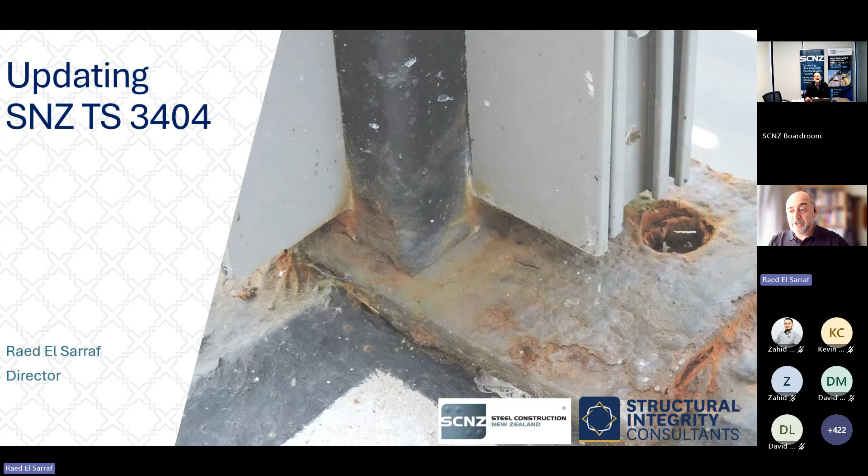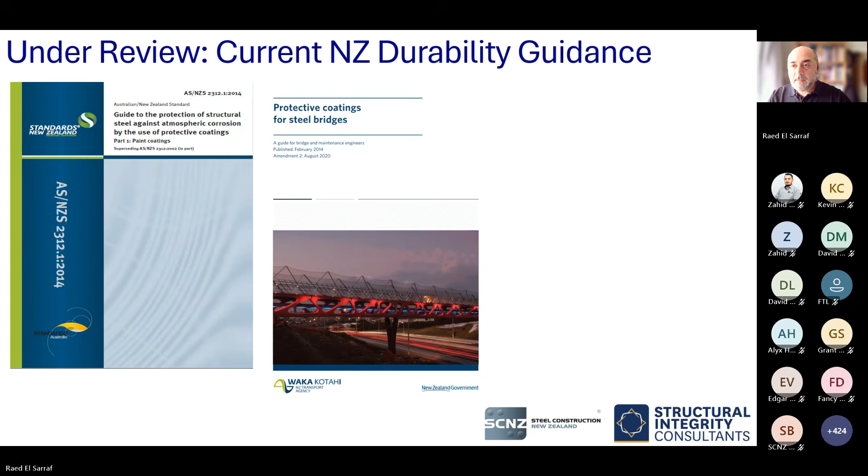So, updating Standard New Zealand Technical Specification 3404. And look, there's a lot to go through, so I'm just going to get into it. At the moment, we're in a very fortunate period of time when a number of documents are currently being revised. The key one is Standard 2312 Part 1. I'm actually on that standards committee as well, and we are not far off from finishing that document and going out to public comment soon. Protective coating for steel bridges, the NZTA document, another document I've co-authored, is also under review. And of course, the document we're here to talk about today, Standard New Zealand Technical Specification 3404.

You're probably now aware that it is out and there's been quite a few changes. The original document was first published in 2018. It was cited in the building code as a means of an acceptable solution in 2018. And we're happy to advise that it's been elevated to a full standard as NZS 3404 Part 3. And as Kevin said, Parts 1 and 2 are currently out for public comment, and there's more about that later on.

We held the first committee meeting to update this document back on the 22nd of July, 2025. Public comments closed 20th of March this year, and it was released just over a year later. I was quite impressed. You kind of forget when you're in the midst of updating and working on these things, but a lot of work went into it, and I'm quite pleased to see that it is out now. And we did receive 118 comments, which I was told is a good number, as in enough to show that people actually read it and gave us good feedback, but just under the number that would show we made a big mistake. So it was just the right number of comments, apparently.

I'd like to acknowledge the committee members. Here they are on the screen. There's quite a few of them, and as you can see, there's a cross-section of the industry, from asset owners, corrosion specialists, and industry representatives. I also wish to recognize and acknowledge Mark Ryburn of MBIE and Willie Mandeno of WSP.

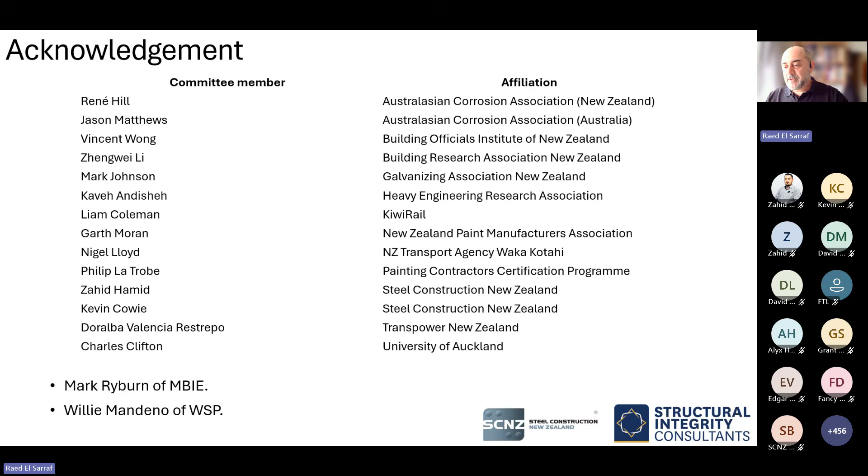So what's the scope? Now we're going to go through key changes, revisions, updates that I would like everyone to be aware of. So what is the scope of this document? It sets out the primary and supplementary corrosion protection systems and technical requirements that are necessary to provide the required level of durability to steel structures and their components as defined in NZS 3404 Part 1 in the New Zealand environment. And like I said, it is showing you a pathway to demonstrate compliance with the acceptable solution as well as the verification method. So pretty much it's all there.

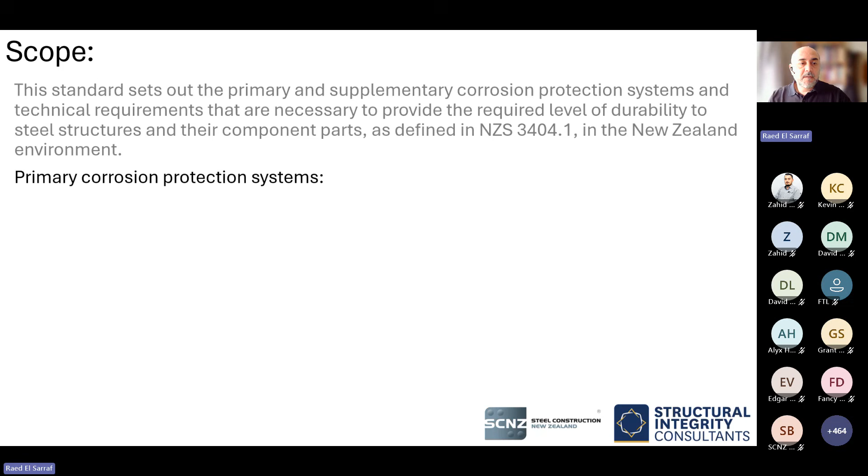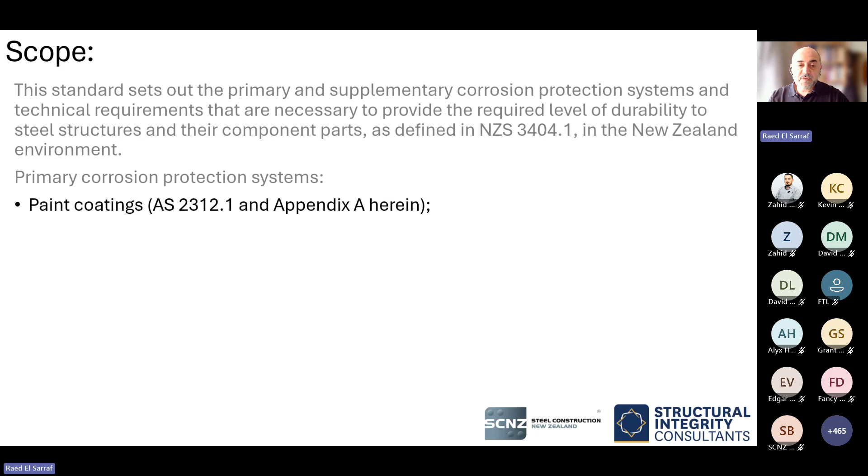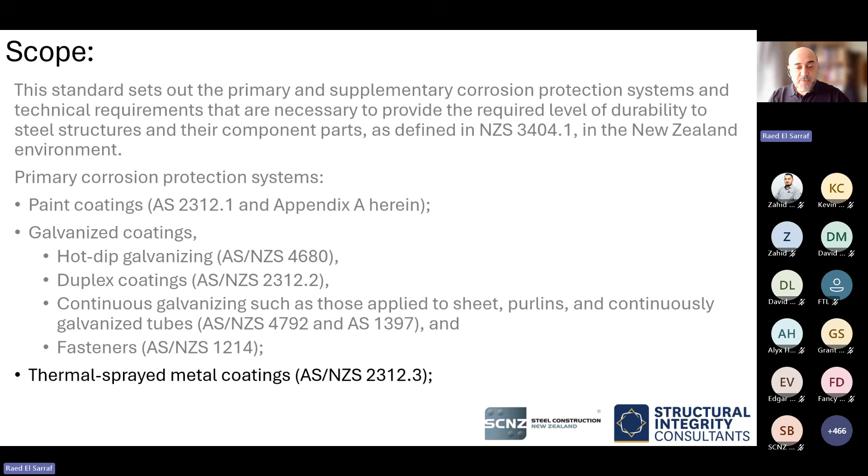So what are the primary corrosion protection systems? Paint coatings, which are 2312 Part 1 and Appendix A. In the document, there are some additional paint systems that we've added from the previous one. Galvanized coatings, so whether it's hot dip, duplex galv, continuous galv, or fasteners, that's what it covers as well. And thermal metal spray coatings, including weathering steel. And of course, you can see it's in addition to the additional references that I refer to.

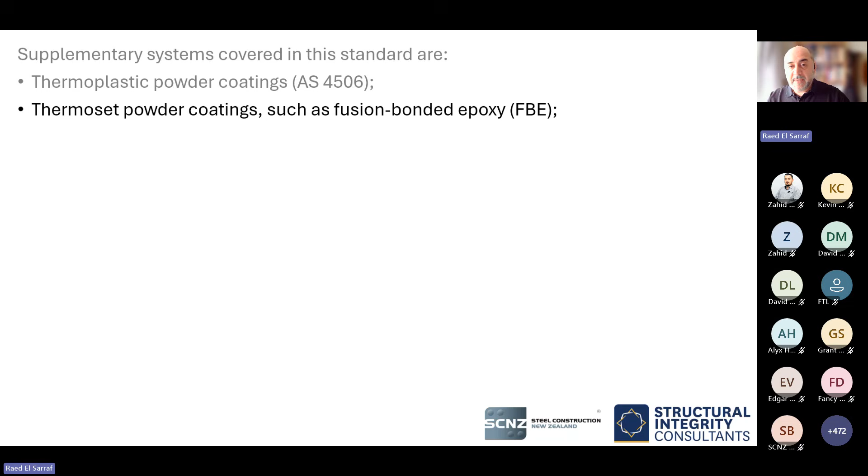Supplementary systems that are also covered in the standard are thermoplastic powder coatings, thermoset powder coatings, such as fusion bonded epoxies. For quite a few years, fusion bonded epoxy, to my recollection, the last 20, 30 years, was not offered in New Zealand, but the last couple of years it's back in the country, and that's the type of system we use, for example, in pipelines, and you can also use it for rock anchors. So it's good to see that type of protection back available in New Zealand.

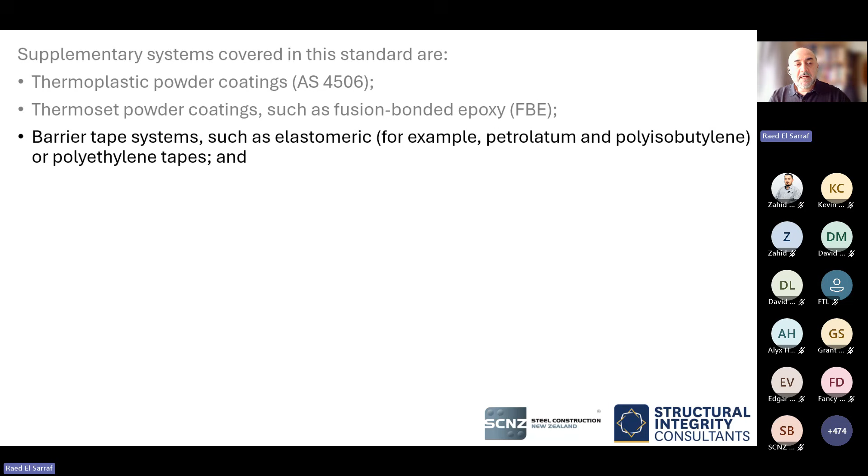Barrier systems: a lot of you are probably familiar with petrolatum, the old Denso tape, but there's also the new viscoelastic type of tapes and polyethylene as well. So barrier tape systems are also included. And some may be familiar with plastic caps used to provide additional protection for bolts and nuts. And there are other protection systems used on fasteners, which we'll cover in a little bit.

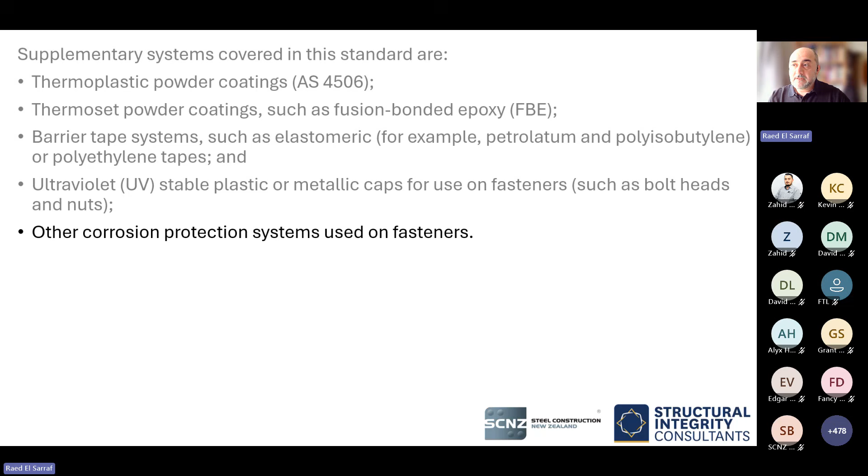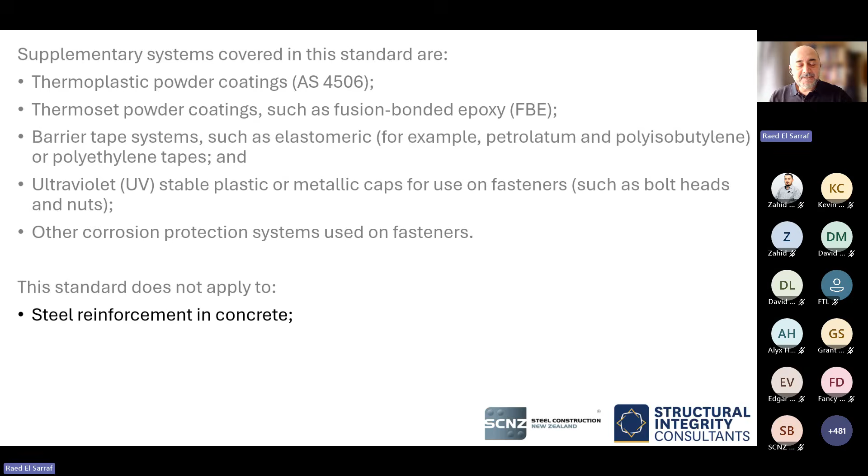So the next key thing, what it does not apply to, and one of them is steel reinforcement in concrete. Over the past number of years, I've seen people try to justify things to do with reinforcement which are not really applicable to the standard. So we now specifically exclude steel reinforcement. So please do not use this document to justify, let's say, mistakes, to put it mildly, in design. And galvanized wire. So those are the two things the standard does not apply to.

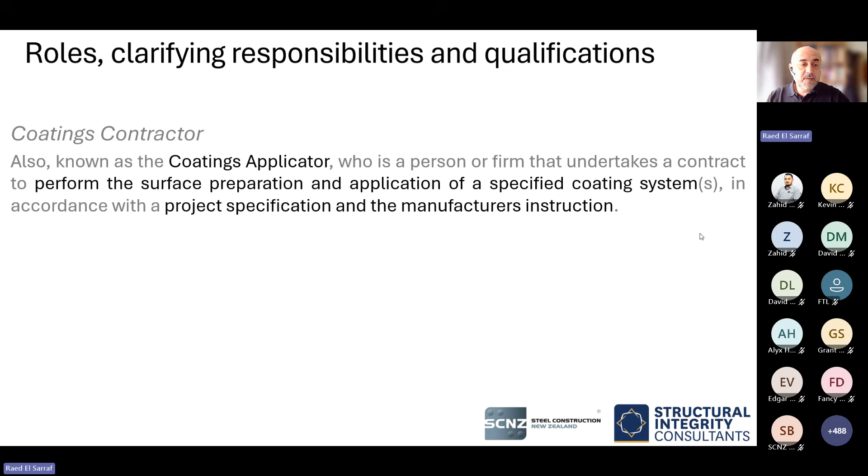The other thing, we also clarified different roles. We've added those to what we had before. So coating contractor pretty much is a coating applicator, and their job is to do the surface preparation and apply the protective coating in accordance with the project specification and the manufacturer's instructions. And from the NZTA and KiwiRail point of view, at the moment, only applicators who have painting coatings certification program accreditation can undertake the work. That's specifically for these two asset owners.

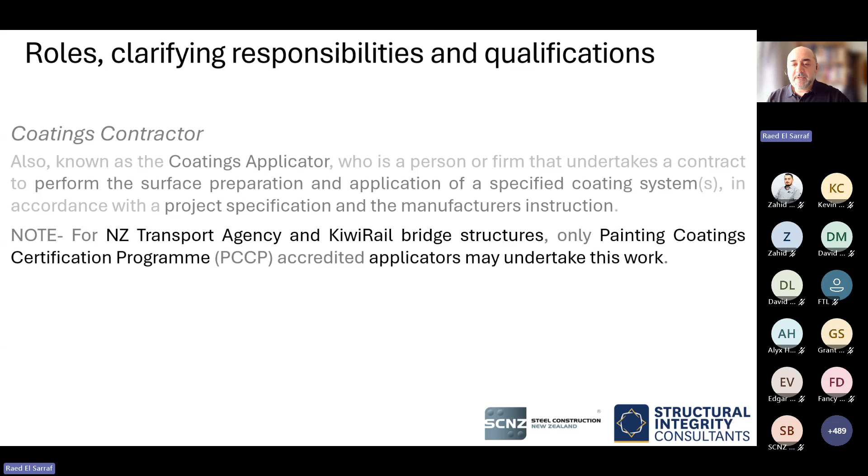For everything else, the recommendation is you have, let's say, an ISO 9001 applicator, but I also understand that SCNZ, with the steel fabricator scheme, are also developing a different scheme that will also help get the applicators accredited, and give you assurance that, I won't say they know what they're doing, but at least they have the right systems and processes in place to ensure that everything goes right.

Corrosion specialists. This was there before. We've just explained or clarified it a little bit better. Such a person is competent to advise, specify, prepare, and or review all matters relating to durability design, corrosion, coating related advice, specification, and or reports. It's pretty much someone like me and others in the industry that you can go to when you need advice on anything related to corrosion and durability.

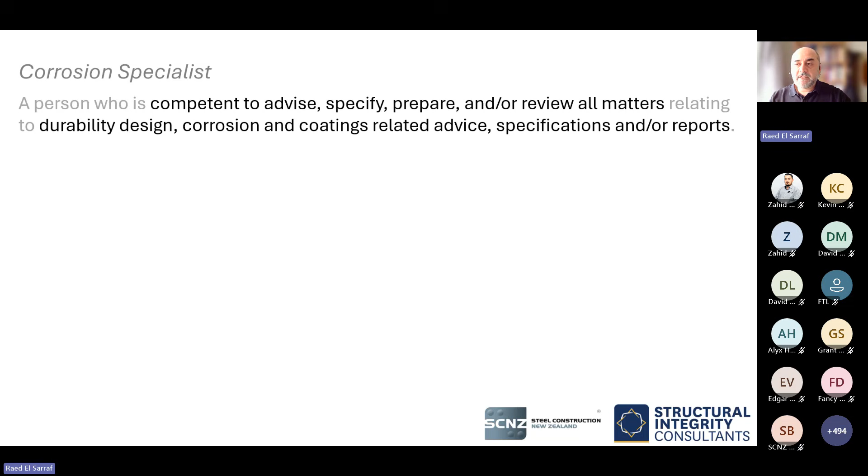Now, that person is not just experienced, they need to have certain qualifications. It is one of them, not all three. So an AMPP corrosion specialist or an AMPP protective coating specialist. Now, for AMPP, some of you will probably remember the old NACE. NACE has joined with SSPC and formed the Association for Materials Protection and Performance. So AMPP is the new NACE, I guess you can say.

Or someone who is an Australasian Corrosion Association technologist, who has either completed the coating selection and specification course or holds the current AMPP certified coating inspector certification. That AMPP certified coating inspector certification is the old NACE 2, if you remember that terminology. So such a person has one of those qualifications or that combination. And the key thing here, to get one of those, you need at least 10 years experience. So it's not someone who just did a course. It's experience and qualification.

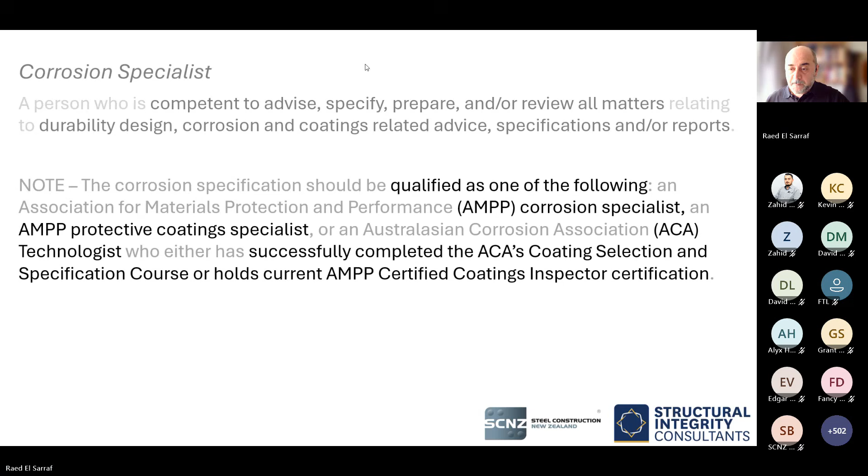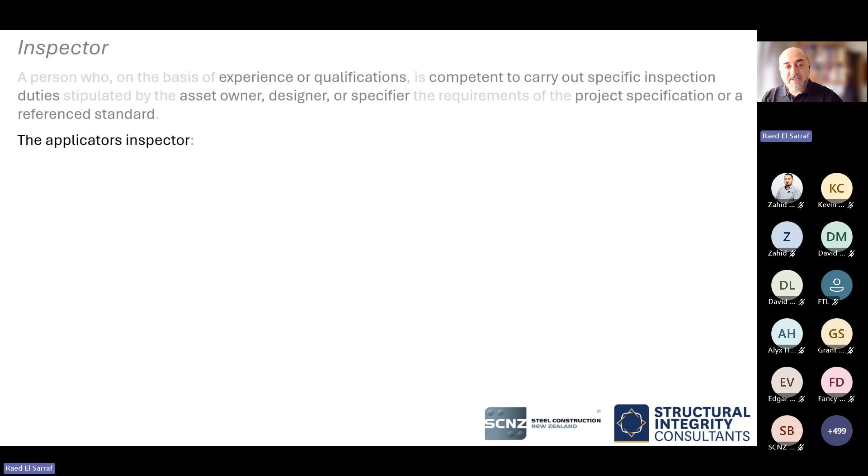Okay, an inspector. Now this is going to be a big thing. So who are inspectors who can do the work? They are, by experience or qualification, competent to carry out specific inspection duties, typically stipulated by the asset owner, designer, or specifier, to make sure that the project specification or reference standard is done the right way and meets the requirements. So the applicator, their inspectors, should have either CBIP, AMPP Basic Coating Inspector qualification, which would be old NACE 1, or if you're doing hot dip galv, an ACA hot dip galv certified inspector.

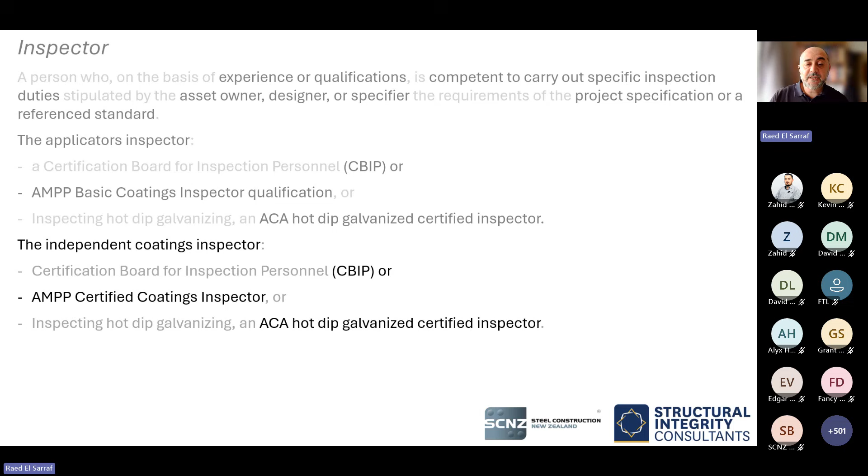If you have engaged an independent third-party coating inspector, same CBIP, but it's the AMPP certified coating inspector, which would be old NACE 2, or for galv, the hot dip galv certified inspector. Now, this has happened a lot in the industry, so we felt that we need to put it in here. That's why I also made it in bold. It should be noted that a protective coating supplier, so your paint supplier representative, is not the right person or is excluded from acting as the applicator inspector or the independent coating inspector.

For the past number of years, I've seen people where they do a job and they said, oh, the paint rep came, he signed it off, it's all good. Well, no, it's not. It's not just someone going out there doing a random check once and that's it. There's a whole process that needs to go through. Again, all that process is listed in 5131. We'll talk about that a little bit more.

But just to clarify, your protective coating supplier representative is not the right person to do the job of an applicator inspector or the independent coating inspector. They can go and do their own internal checks and do spot checks or whatever, but they're not fulfilling that role. Okay? So please go out there now and tell people you can't do that.

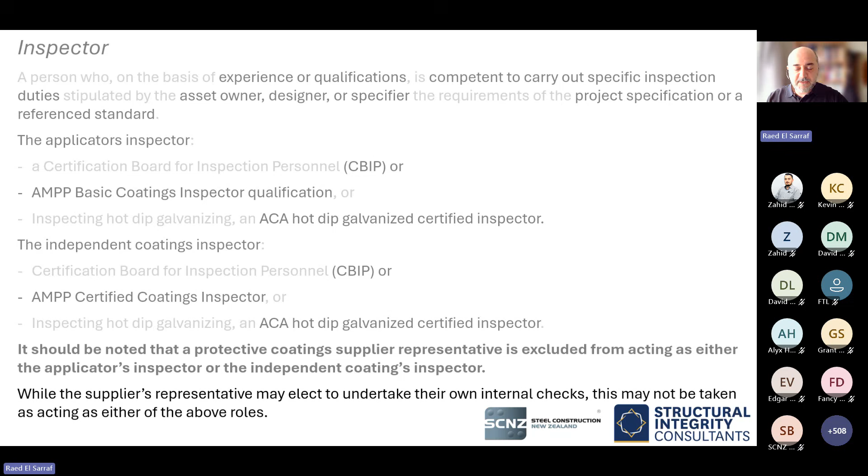We have clarified now the following flowchart that just tells you how to specify a corrosion protection system for both atmospheric and non-atmospheric corrosivity. This was based on the work that was in the HERA report R4133, the New Zealand Steelwork Corrosion and Coating Guide. So we've just tidied it up and made it align for this document here. So if you follow those steps, you should get the answer that you're after.

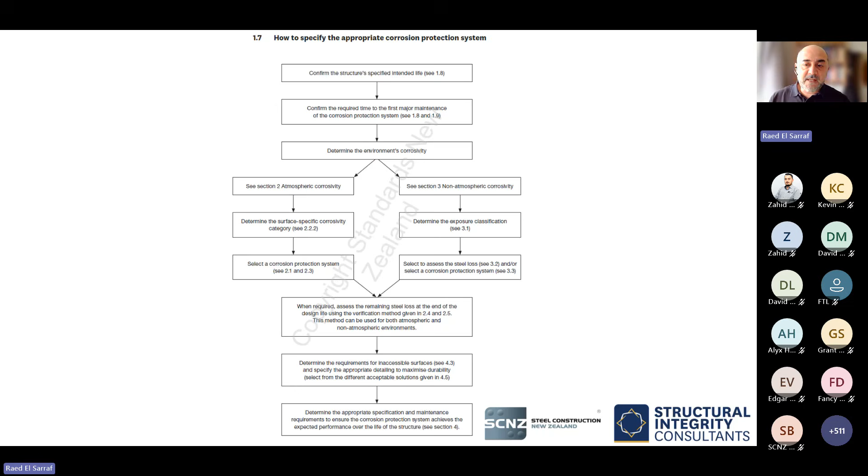Okay, a key change here. You're probably all familiar with the corrosion maps and table 2 that give you the surface-specific atmospheric corrosivity for external and internal environments. The key change here, hopefully you can see my mouse, is down here, C3. So previously this used to be 5 to 20 kilometers for West Coast and South Coast, South Island, and it was 1 to 5 kilometers. That has been reduced to these numbers, to within 5 and within 1 kilometer, and what that means is for external exposed, it is C3,

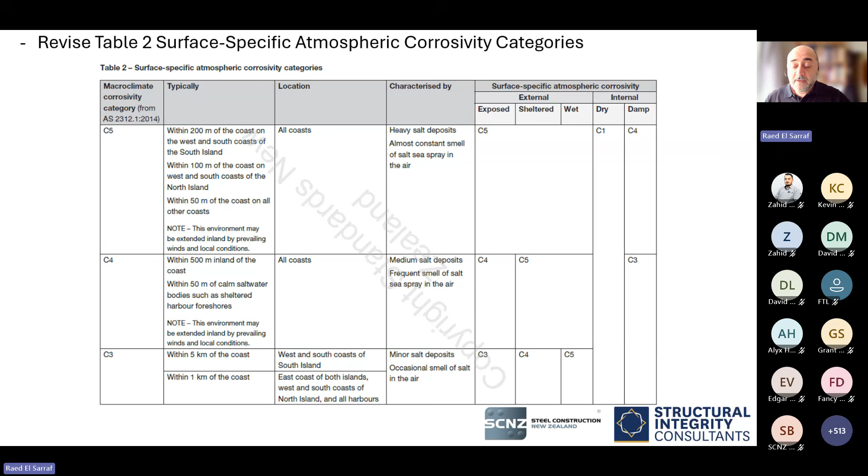external sheltered, which is sheltered as in non-rainwashed surfaces underneath an awning or underneath a bridge, for example, that is C4. So the key difference here is we've reduced those distances. Now, we didn't reduce them for the fun of reducing. This was based on a multi-year study done by BRANZ so that we can justify that change. So what that also means is what happened in those, whoops, jumped one.

So again, for the distance of 5 kilometers to 20 or 1 to 5, for external exposed C3, external sheltered is also C3, while before that was C4. And what that meant was the more corrosive environment governed in the past, and you would have had to go to a more robust system. This allows us to go back to a more realistic system, more suitable for that given exposure. So that will save a bit of effort, a bit of money when you specify the different systems that we have.

Same thing here with C2. Previously, that was C2 for external exposed, which was low corrosivity, but previously external sheltered was C3, so that's now C2 for both. So again, that gives you the ability to pick a more realistic, optimal corrosion protection system for that particular exposure, and that is a big change from what we had before.

For geothermal sources, refer to the different clause specifically for geothermal, and you probably have seen in the news recently the work that Zhengwei Li out of BRANZ did for the Chatham Islands. The Chatham Islands are a part of New Zealand, so they are included here. Someone did mention to us, you haven't included Stewart Island. It's like, well, because the work hasn't been done yet. So one day soon, maybe the next version of this document, we can finally put Stewart Island on. But for now, these are the main changes in this particular case.

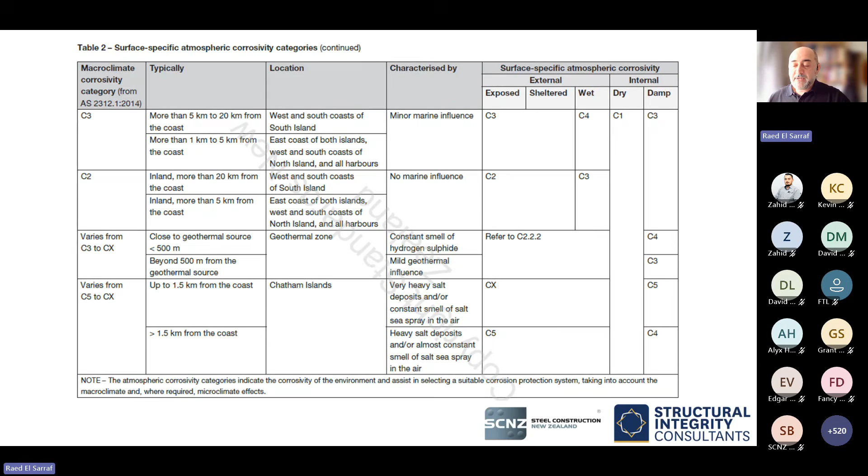Better clarification on what hidden steelwork, what is considered dry or damp. A lot of people ask that question still. So hidden steelwork that is within a fully insulated area behind a thermal break. And if you've been to my presentation in the past, you probably heard me talking about thermal breaks. And thermal breaks is a requirement under the building code clause E2 and 3, if I remember correctly.

If you have steelwork behind the thermal break, behind insulation within the building cavity, then you can take that as dry. Now, what is dry is basically inside a fully air-conditioned office or apartment building. Technically speaking, if you're in a dry environment, it is pretty much C1, which means you can leave steel unpainted, and we'll point that out a little bit.

If you are on the cold side of the dew point, so there's no thermal breaks, especially, for example, warehouses, as you can see in the definition in the next line, that is considered to be damp. And as we show with the previous slide on the tables for internal dry or damp, internal dry is C1, internal damp is C3 at the minimum.

All of those definitions, clarification of what they mean, are also given in R4133, which is included under Note 1. So R4133 goes with the science of what that means. And a lot of this document was really designed where a lot of the science is in R4133, which, if you're a HERA member, you can download for free as part of your membership.

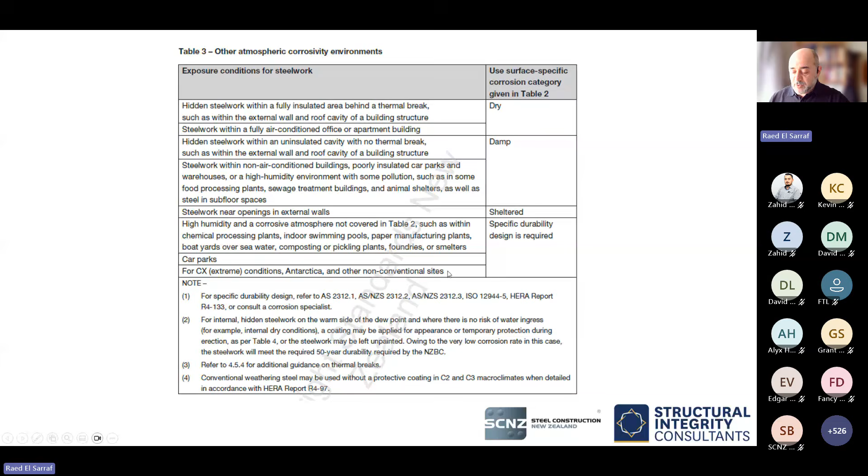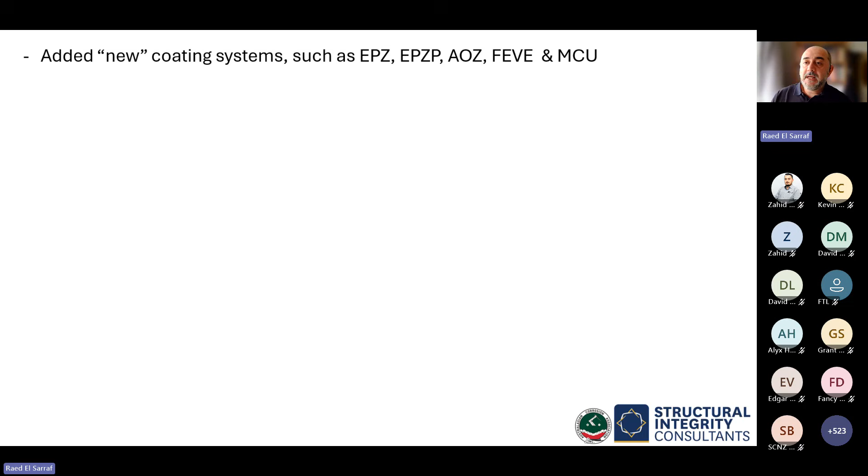We have added new coating systems such as epoxy zinc, zinc phosphate, aromatic thermoplastic organic zinc, fluoropolymer, and moisture-cured urethane. We've expanded upon those. And for those who live in Auckland, you're probably familiar with the Pukiko Bridge, I believe they call it, which was refurbished, the first motorway bridge that was reinstated with fluoropolymer.

Hopefully the red still looks nice and red and flash. It's been a few years since I've been there.

We have added 50-year coating durability systems to satisfy the 50-year requirement of the building code. So that's all given for C2 to C5 environments, while before we stopped at 40.

And now just remember the paint system that we have, or the corrosion protection system, which does include galv and metal spray, given in our document 3404 part 3, are not the only systems you can use. There are others, such as those given in the paint standard 2312 part 1, the galv standard part 2, the metal spray part 3, and also now for the first time ISO 12944 part 5. So it's not just what we have here.

You can go to other systems, or if you go to a paint supplier or corrosion specialist and they come to you and say, well, you can consider this system here according to one of these documents, that is okay. So don't limit yourself to what's in 3404 part 3 only. There are other systems you can use as well.

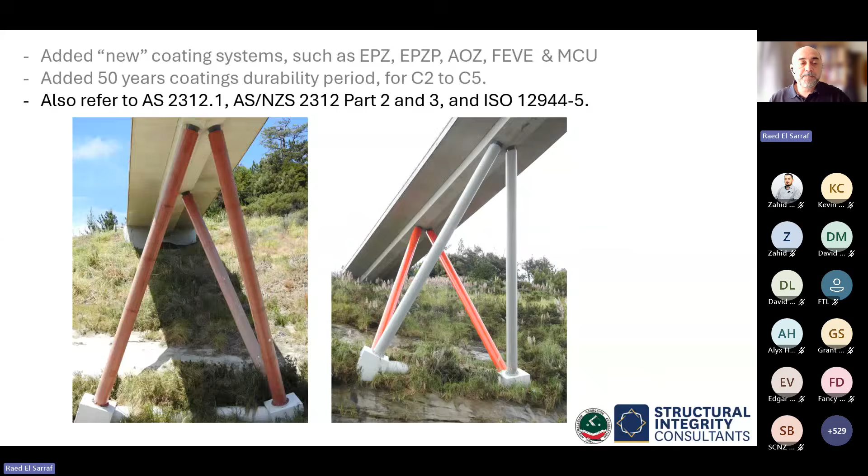Now, in the past we had it, but apparently it was hidden in the notes and wasn't that clear. But now we specifically say that steel in C1 does not require additional corrosion protection and may be left unpainted or bare. This is now a clause in the standard that you can use, as long as it's within the warm side of the dew point, thermal breaks, insulation, all that stuff that you need to comply with.

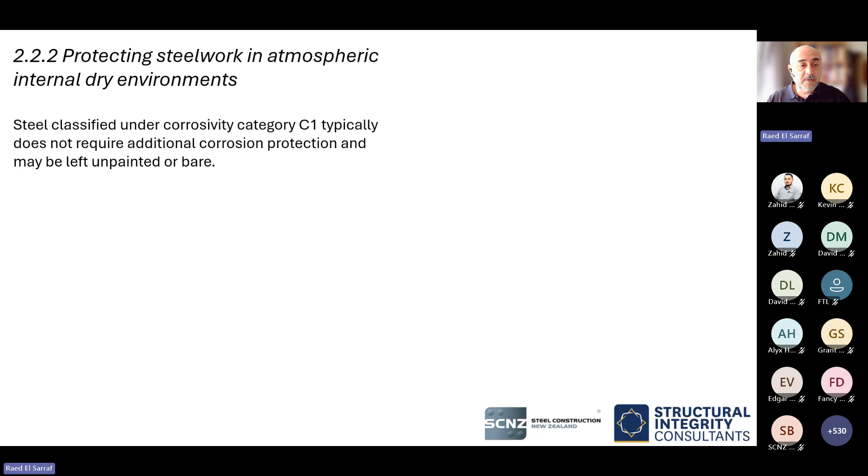However, if you do require an aesthetic finish or temporary protection during construction, then you can use the guidance, the systems given in Table 4. They're all there, and it tells you what exposure it can be exposed to, which is the last column, and how long it may be left in that condition. So the options are there for you to do so.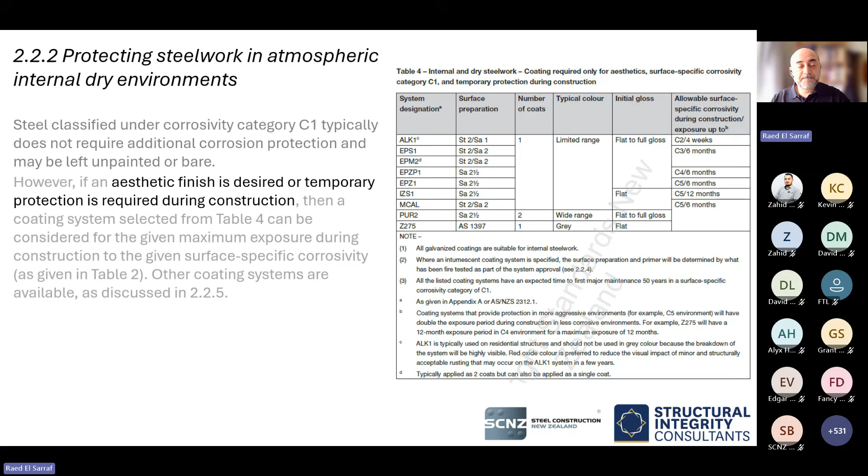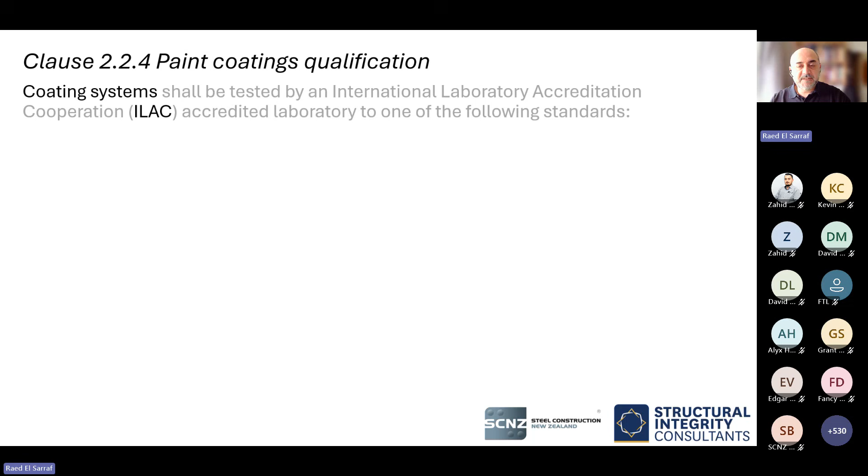This is really more for the paint supplier. In New Zealand, we're quite fortunate that most of the paint suppliers are already global companies. They have all the required qualifications. Their paint companies are already accredited and qualified. But if you do have, let's say, a new system, as long as it's been coating system tested to an ILAC accredited lab, and it has one of these.

So most of the systems in New Zealand do have APAS, Australian Paint Approval Scheme. Most of them have that. Or NORSOK M501, which is pretty much what you'd consider using in a marine environment, C5-CX. And again, for the first time now, we've clarified it, ISO 12944 Part 6 or Part 9.

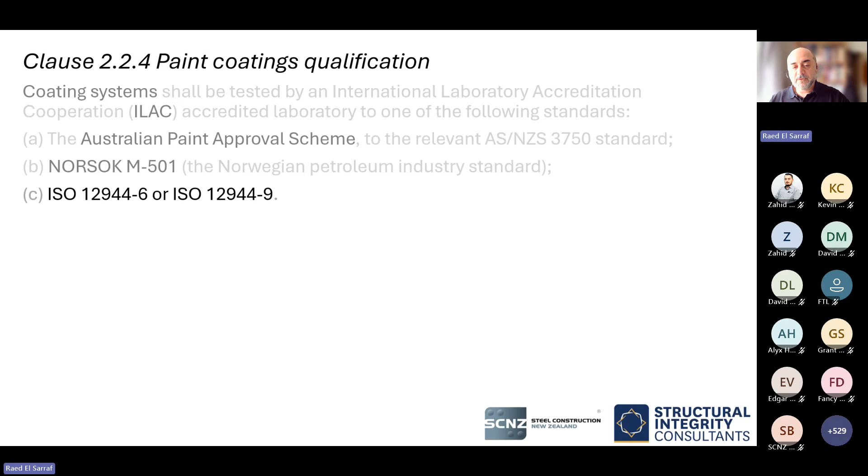So if you have someone come to you with a paint system that has one of these, you are okay, in the sense that this paint system has been tested, it's accredited, we know it will perform and conform to these requirements and these standards.

Now, why this is important, the other part of it is you probably heard in the past, a lot of paint companies would come to you and say, oh, we've done these tests, and based on salt spray test results, it's okay. We're specifically saying, no, it's not. We do not accept salt spray test results to ISO 9227 or ASTM B117. Not accepted. What we have before is what we want, especially the NORSOK and ISO 12944 Part 9.

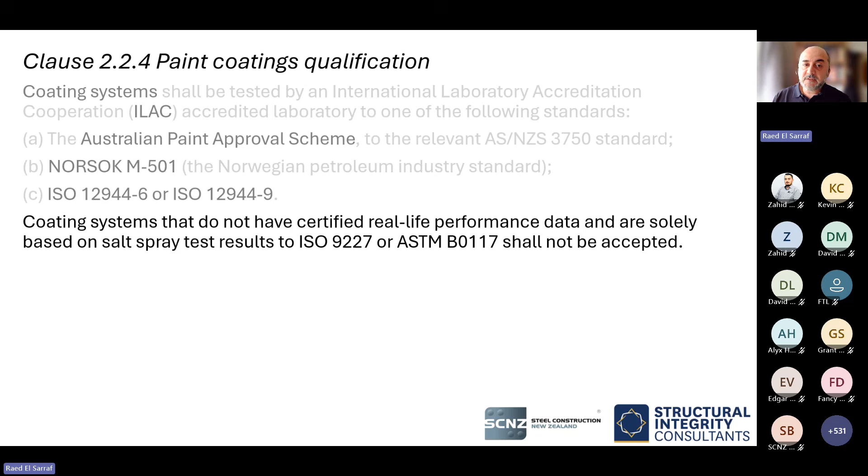Those are really stringent cyclic accelerated weathering testing, which are really suited to show that paint system will give you typically, whatever it is, 15, 20, 25 years in a C5 marine environment. That's what we want. Now, this is for most people, you're probably not going to be exposed to this, but the next part is important.

For intumescent coatings, and this is, I understand, quite a big topic at the moment in the industry, we're talking about the full system. So it's not just the fire intumescent itself having undergone a fire test. The full system, which is typically a primer, build coat, an intumescent, or even if it's just an intumescent, the full system must be tested for the given standards here. So AS 1530.4 or NZS BS 476-21. And where durability is required, then everything else we have in this standard must be complied with.

And again, I gave a presentation quite a few years ago that showed that you can have intumescent systems, whole systems that give you both durability and fire protection. But the most important thing here is if someone comes to you and says you should use this intumescent coating, but then you're going to use someone else's primer or someone else's top coat, and the whole system was not tested to show that they're compatible and work together, then you shouldn't accept that solution. Go with a full coating system that's been tested.

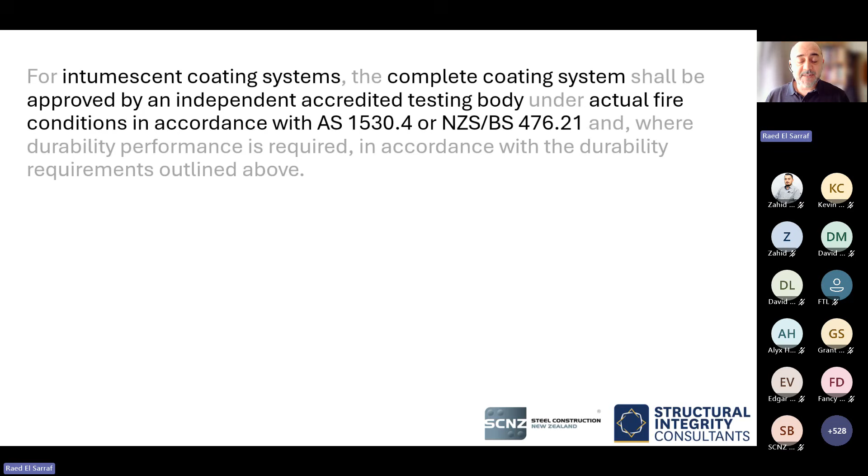And that's what I was saying here. All components comprising the system shall be compatible and shall have been tested together as a complete system. That's probably another big lesson that you can go out to market now and say. So honestly, if you go to the big paint suppliers, they'll probably come to you with a full system and you will be fine. It's just when you have someone coming with, use this intumescent and we'll just mix and match. It doesn't work that way.

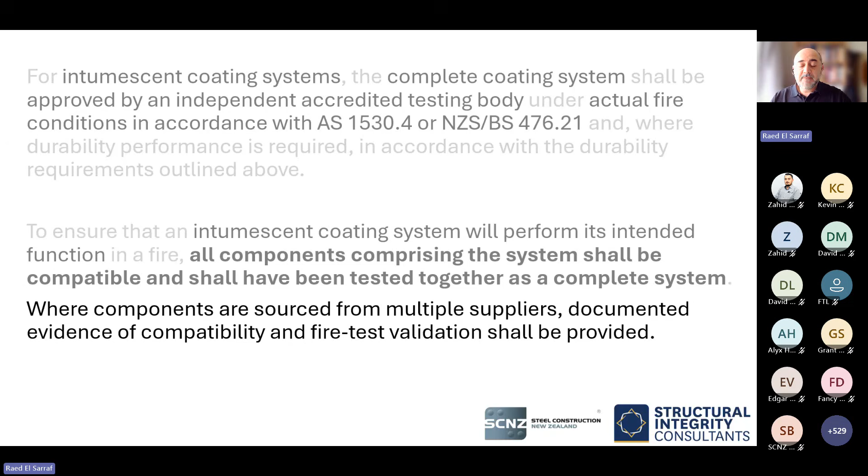And where it is sourced from multiple suppliers, they just have to show that the test has been done. That's it. That's all you need to ask them. Like, okay, can you show me the test has been done? If they have, then it's fine. But that's what you need to go for.

Other paint systems we've also discussed, just referencing here, you don't have to read this. So powder coatings is now there with the references. Proprietary roofing products, so you've probably seen New Zealand Steel or New Zealand Metal Roofing Manufacturers requirements for the proprietary system, so follow their recommendations. And fasteners, so it's not just gal fasteners. So if you're familiar with property class 8.8 bolts, they always come gal, that's fine.

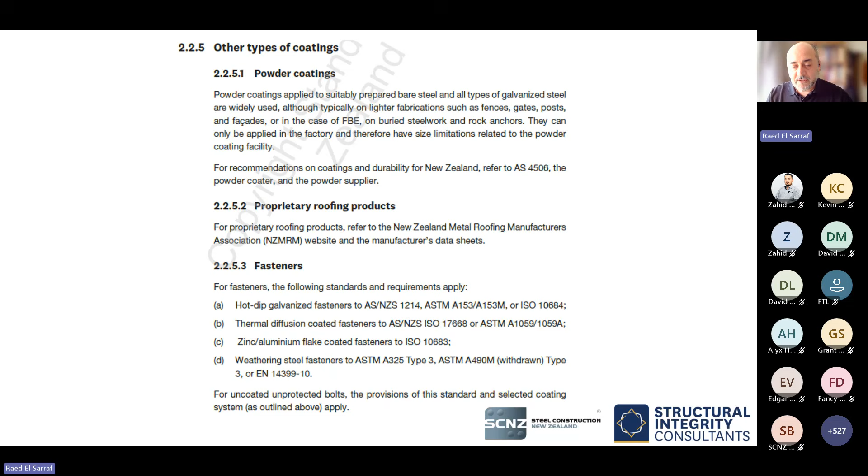But there's also other types of corrosion protection systems for fasteners, from thermal diffusion coated fasteners, flake coated fasteners, and weathering steel. You can use unpainted black bolts. Just be aware that once they go in, they need to be blasted and painted, and all the requirements as you do for painting steel apply. So again, it's just clarifying here, there's not just gal bolts, there are other systems, and these are the standards they need to comply with for you to use them and specify them.

Over the years, there's always this conversation about aesthetics and top coats. So because we have expected time to first major maintenance, which if you look at a system is when the coatings start breaking down and you have red rust, which is fine. That's why we have the 25 years, the 40 years, and 50 and so forth. If aesthetics is important, then the color fade resistance and gloss retention of that top coat is important here. And it is less than the expected time to first major maintenance.

So just to clarify that, we've added a new clause, 2.2.6, which gives you a bit of an idea of the typical life or period where that top coat needs to be refreshed for a C3 or under environment. So acrylics, 10 to 15 years, moisture-cured urethane, 10 to 15, polyurethanes and polysiloxanes, 10 to 15, fluoropolymers is 15 to 20. So what that now tells you is if you selected a system, you can go back to the client and say, as a system, let's say a PUR5 is a common system in a C3 environment, that will give you 25 plus years time to first major maintenance.

But you can say, Mr. Client, Mrs. Client, what that means also is in year 10 and 15, you probably have to refresh the top coat. Especially when you have primary colors, unfortunately, the reds, blues, and yellows, they just fade in our high UV in our sun. So that just gives you a bit of understanding, both to educate the client and yourself on, okay, if I pick that system, I just need to let them know that I need to refresh it.

Now, that does not mean you need to take everything off. In most cases, if you get in at the right time, it's probably a wash. Some systems you need to abrade a little bit. You can put it straight on, or you may use a tie coat, but you're not blasting everything off. It's much more what we can call minor maintenance when you refresh the top coat. For a C4 or higher environment, the expected time to first maintenance applies. We just go with that. So this is more for a C3 and under. And always consult with the paint supplier for guidance on achieving the optimal aesthetic requirements.

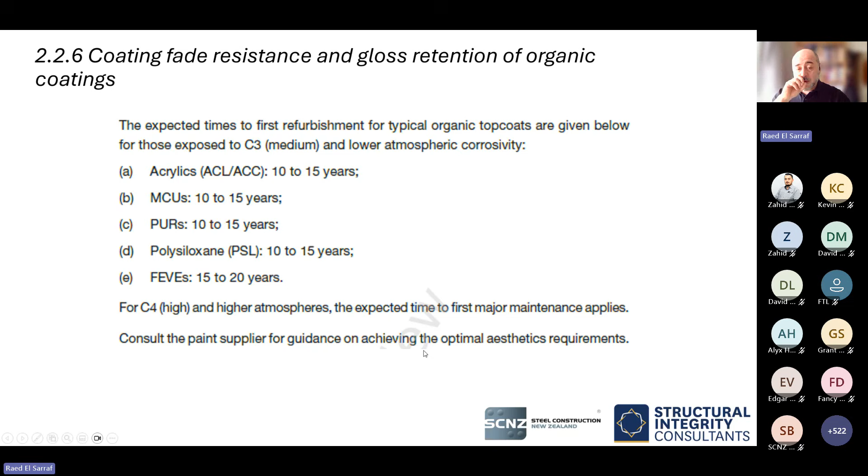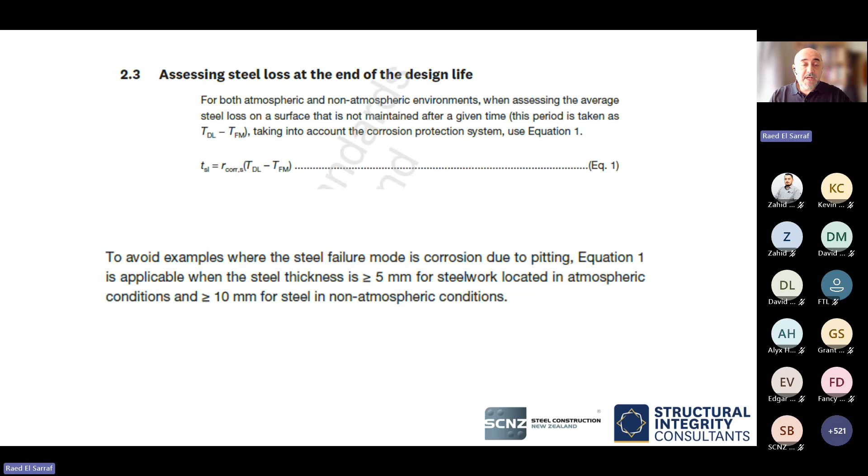Next up is a brand new equation, assessing the remaining expected life of zinc, so mainly for hot dip galv and metal spray. We did mention here aromatic thermoplastic copolymer organic zinc, which is a big word. It's made as a form of a zinc-rich coating, and in this particular case, you need to talk to the supplier. But if we're talking hot dip galvanizing, zinc metal spray, you can estimate what is the remaining life of the zinc in years for the given environment and system.

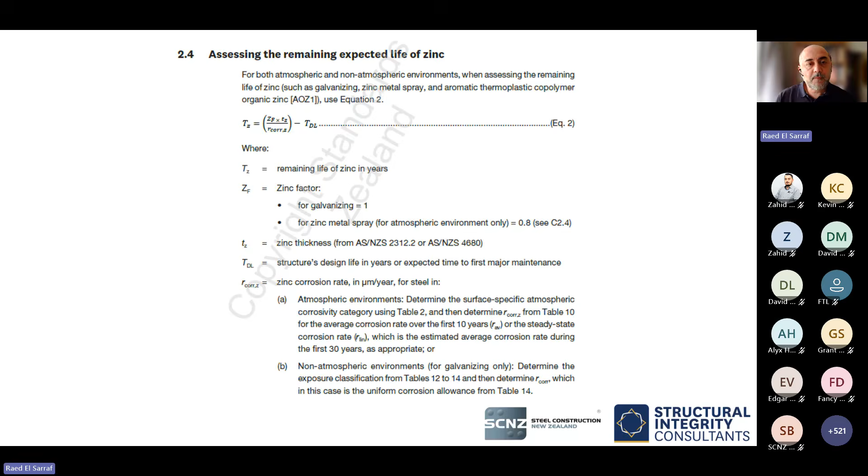And that's for both atmospheric and non-atmospheric, and non-atmospheric for galv only, which then refers to section 3, which relates to non-atmospheric corrosion. But this now gives you the idea of, okay, I got some galv, I don't know how long it will last, this will give you an idea, and you can estimate that. So that's new.

My only request for everyone is if you are dealing with piles or buried steelwork, when you talk to your geotech, preferably before they go out to site, tell them, can you please at least do a soil pH, chloride testing, or resistivity? One of these tests, not all of them. And I was told the soil pH is the cheapest one, the simplest one to do, because at the moment, nobody does that. Geotechs do not do that. It's very common for people to come to me later and say, how long will this steel last in the soil? And the first thing I say is, what's your pH or chloride or resistivity?

And they're like, we don't know. And the geotech has already been there and the report has been issued and we need this tomorrow. It's like, well, now we start guessing. It is a very simple test. Please, please tell your geotechs, do the soil pH, because it's not a standard practice at the moment.

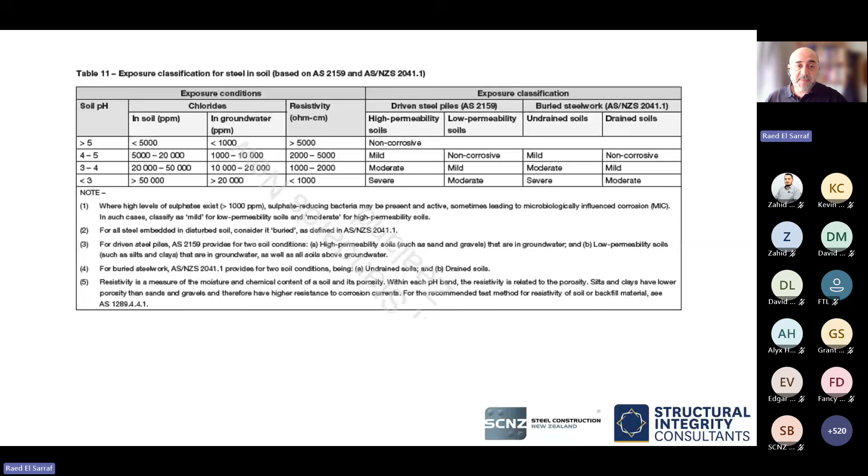Because once they give you that, they do their testing, and you now know what your soil is for your pile, let's say, and what type of corrosivity it is, you can then follow through with what's given in section 3 of the standard, and it will guide you through what is the corrosion rate for that given corrosive, mild, moderate, or severe environment. And then it'll also give you guidance on how to protect it. So that's another big lesson, please, soil pH. Go with that.

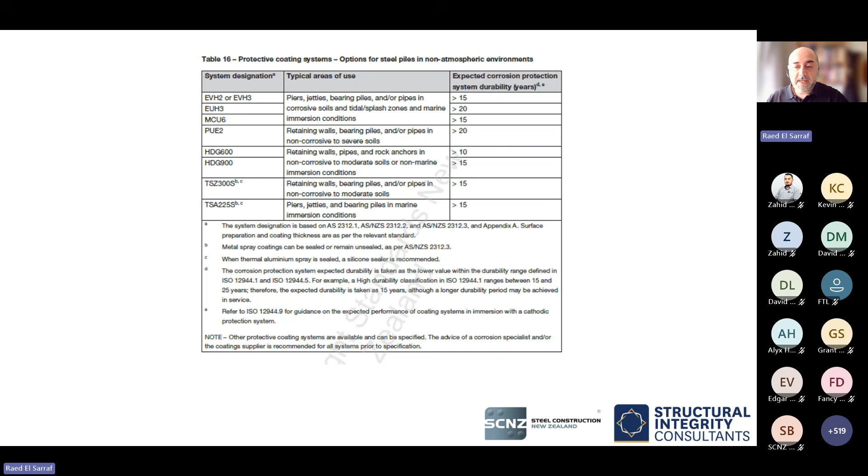So there's an opportunity we're bidding on. Fingers crossed that we get the funding, and then we can start doing some research on this. But the information is there to guide you and help you. And again, always feel free to contact a corrosion specialist or the coating supplier when you need more help.

Section 4 has been fully rewritten. A massive focus on quality, ensuring coating performance. All the appropriate references to 5131 with expanded commentary as well. And clauses that cover surface preparation and application of the corrosion protection system, heavily based on 5131, the inspection of coatings, and inaccessible surfaces.

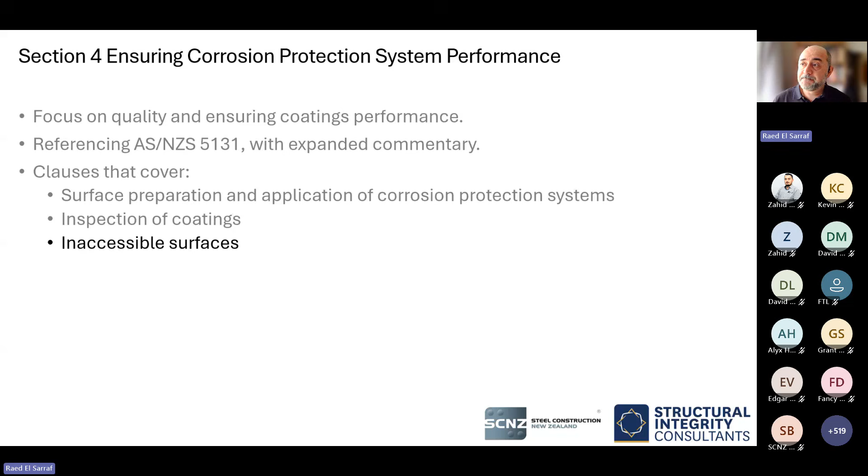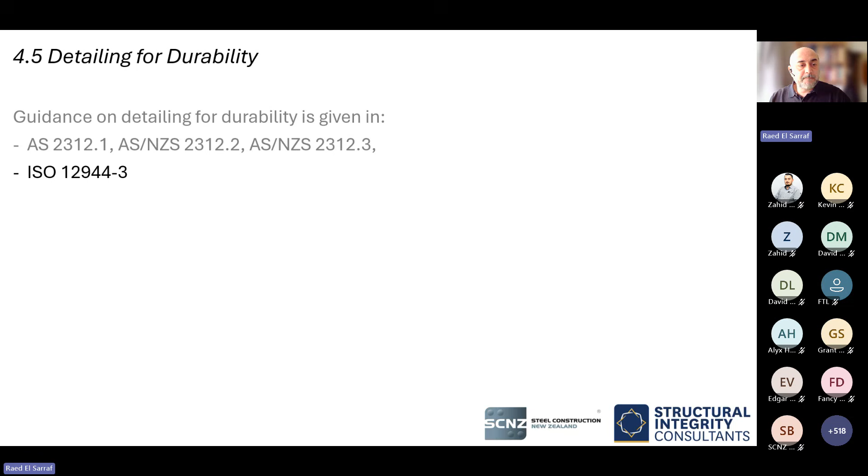We've also added detailing for durability. A lot of those used to be in HERA Report R4-133. Again, all the science is there. We didn't replicate everything. We've just taken those particular details to help you. So all the guidance on durability is given in there at the moment. There's other references you can go to. So 2312, Part 1, 2, and 3. ISO 12944, Part 3. BRANZ, designing for maintenance, and HERA Report R4-133. So all the science is in the last two. The first two are standards with some guidance on how you detail.

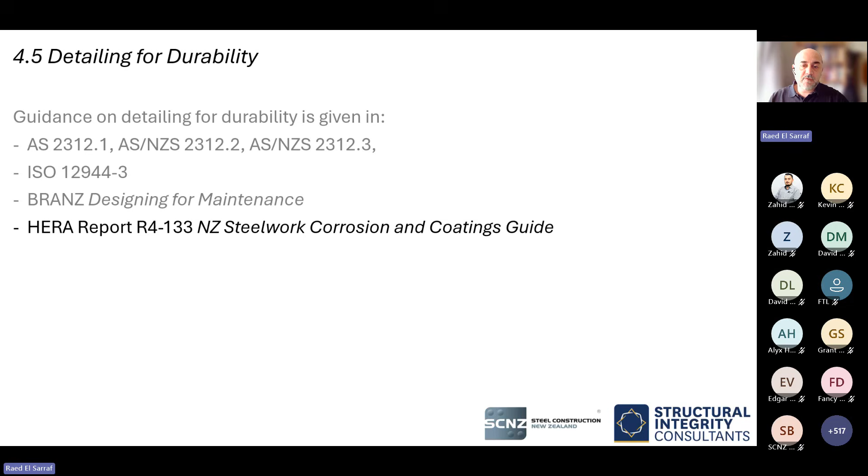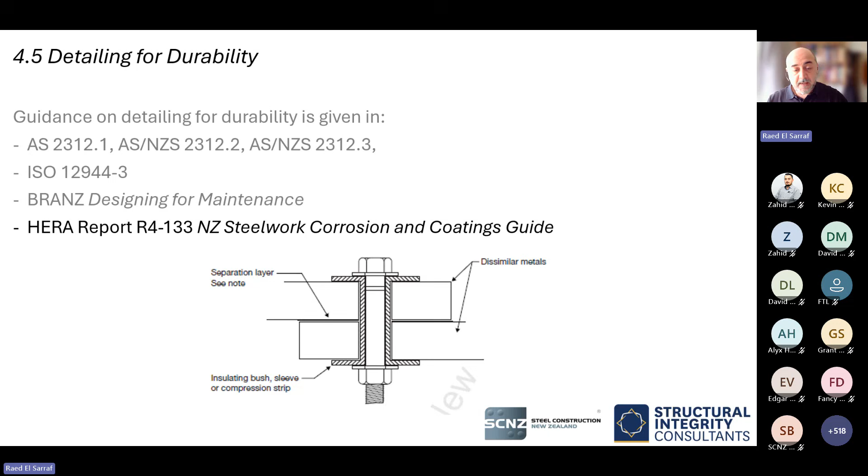But in addition to that, we've added here now. So for example, if you need something to protect you against dissimilar metal corrosion, if you're mixing stainless steel bolts with mild steel, here is an example of how you can protect and separate them. You can buy these, they're called top hat washers. They usually come in 2 pieces for each end. They're either plastic or neoprene, or you put separation layers. And again, all the guidance is there. It's actually always been there in R4-133, pretty much from 2005 and in 2011 and 2020 when we last updated it. We've just added it here to make it clear for everyone.

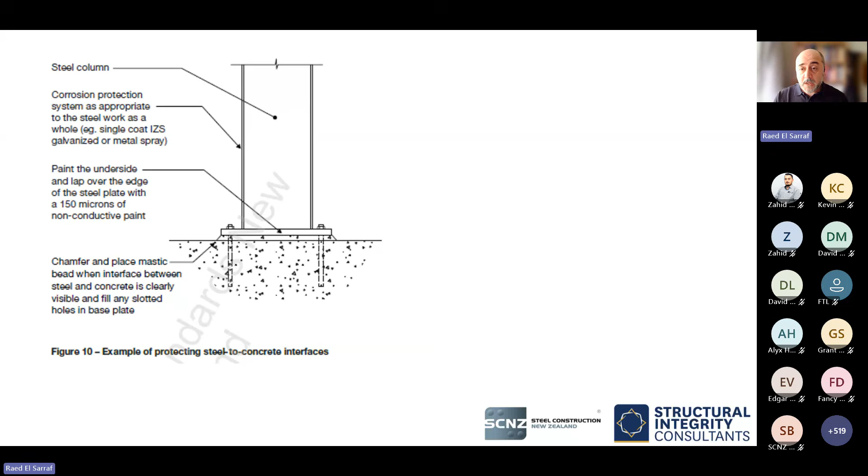Another typical example, hopefully you're all familiar with this now, is how to protect base plates. And you probably heard about the 150 microns of non-conductive paint, which is an epoxy, for example. Why? Because base plates do corrode. And again, I've been talking about this for quite a few years. This is an example on the Cambridge bypass quite a few years ago, brand new galvanized Texas rail barrier, and within 2 years they were corroding heavily.

And it was actually not the steel's fault or the galvanizer's fault. It was just that the dry pack mortar wasn't installed correctly. There were major voids, water got in, and we just created a beautiful acidic environment that ate through the zinc, which is why putting a little bit of extra paint is very cheap insurance in that case. That costs a lot of money to fix.

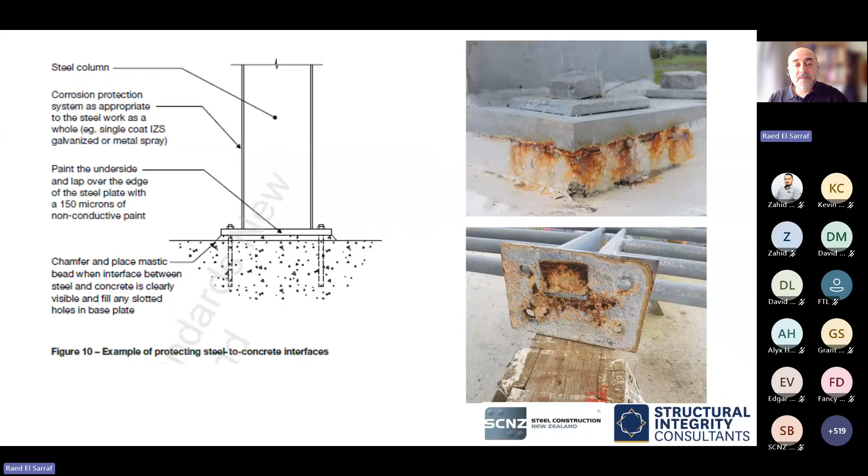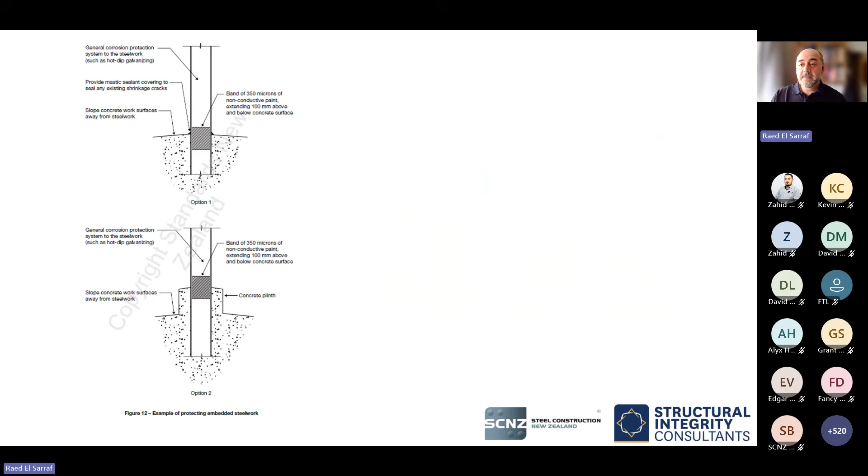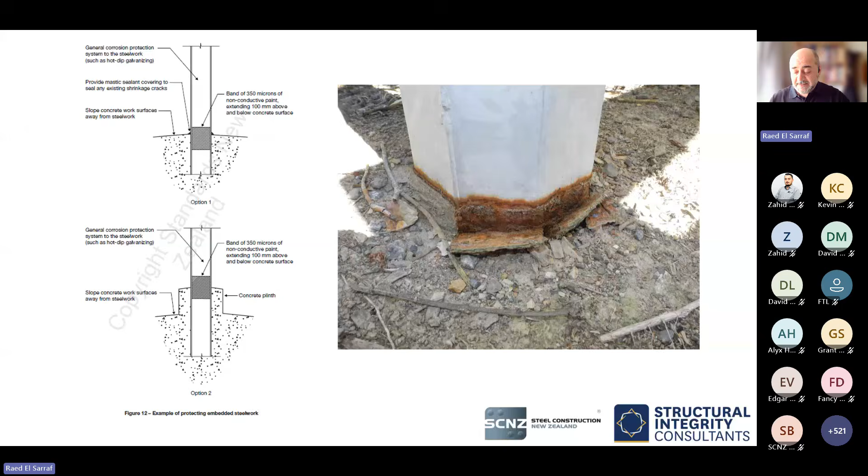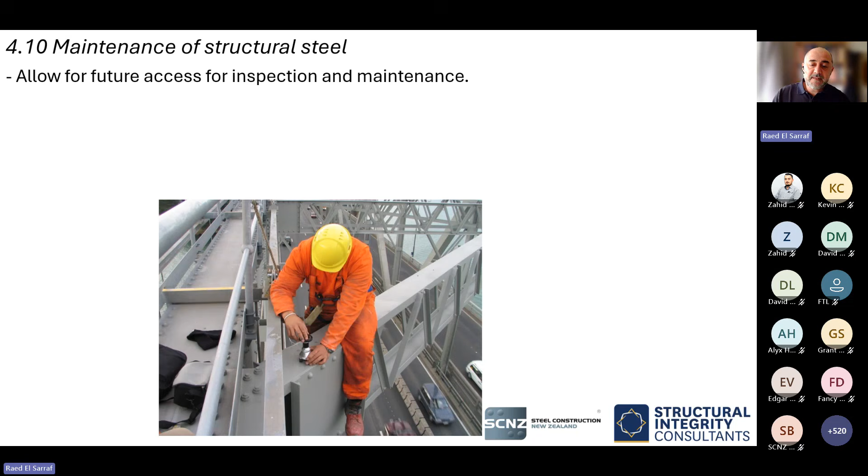Maintenance of structural steel, just a bit of clarification. Honestly, a lot of this is, I guess you can say common sense, but it's actually now given. So always allow for future access for inspection and maintenance. We don't do this anymore. This is back in the good old days. To do something like this guy's doing on the Auckland Harbour Bridge, there's a road closure and everything. But back in the good old days, that was normal.

Otherwise, if you have a situation where your component or structure is in a really difficult location, where access for inspection and maintenance is pretty much impossible, then you need to specify a corrosion protection system that can meet the project requirements without maintenance. Or you incorporate the corrosion allowance into the structural design as discussed earlier in the equation section, clause 2.3.

But also they recommend that you consider developing a corrosion management plan and maintenance specification. So it's not just a question of I'm going to put a paint system and it will last X amount of years with nothing. No, you need to start thinking. You need to treat the corrosion protection system as an asset by itself. It really saves a lot of money in the long run when you do it right at the design stage.

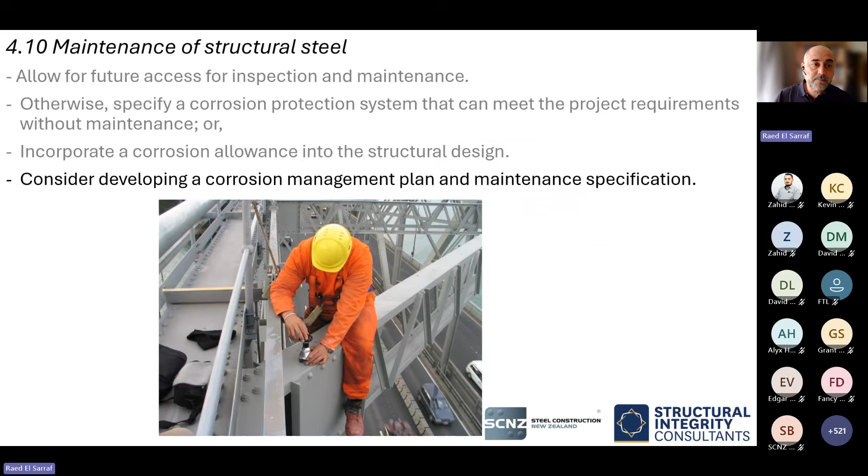We're not far off. There's a new Appendix B, which covers a sampling plan for quality level 2, PC2 to 5131. There had been a few situations in the last few years where people are like, well, how many samples or how many testing or sample spots do I take? So we've clarified that to help mainly the inspector in this case.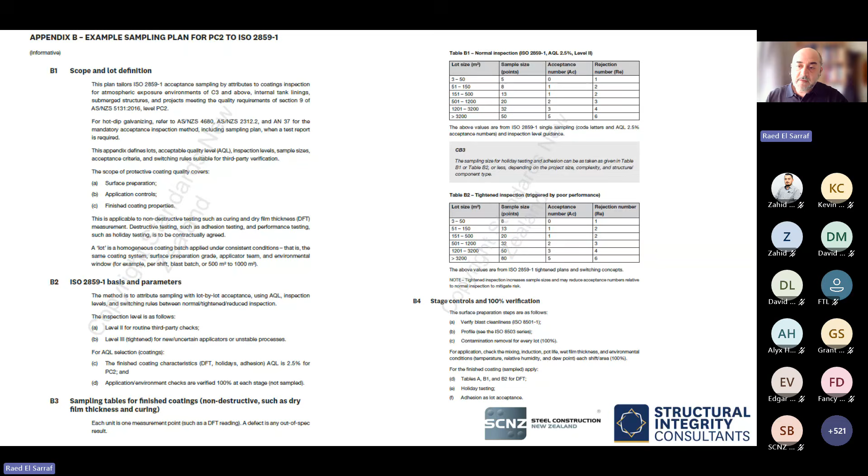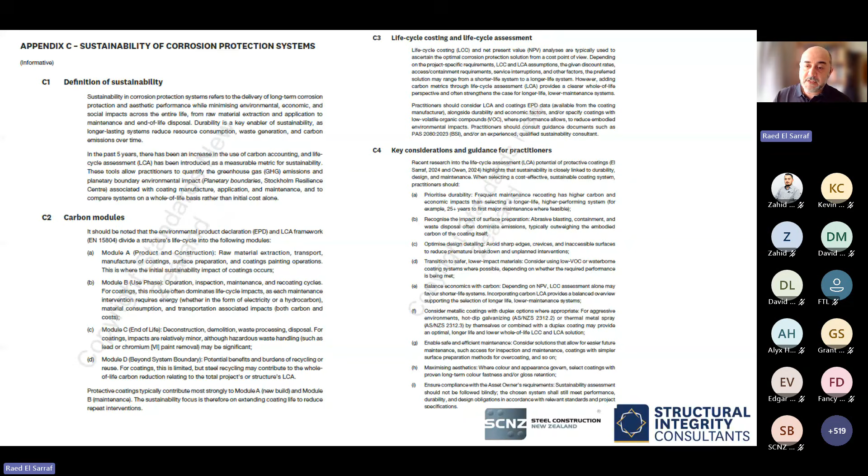There's a whole new section on sustainability. I'm not going to go through this now, but it's pretty much, I think, the first time in a lot of standards that something relating to sustainability of corrosion protection systems was included. And it talks about the definition of sustainability, explanation of the carbon modules, the use of environmental product declarations, EPDs, carbon analysis in addition to life cycle costing, and key considerations for practitioners about how to design an optimal low-carbon sustainable solution.

Now, the good news is NZS 3404 is available for free. It's a free download. Please download it, have a look at it. While I was going through this presentation, I found a few errors, typos, so we'll pick those up and tidy them up in the next version. But it is a free download, and hopefully it can help you, which is the whole purpose of this document.

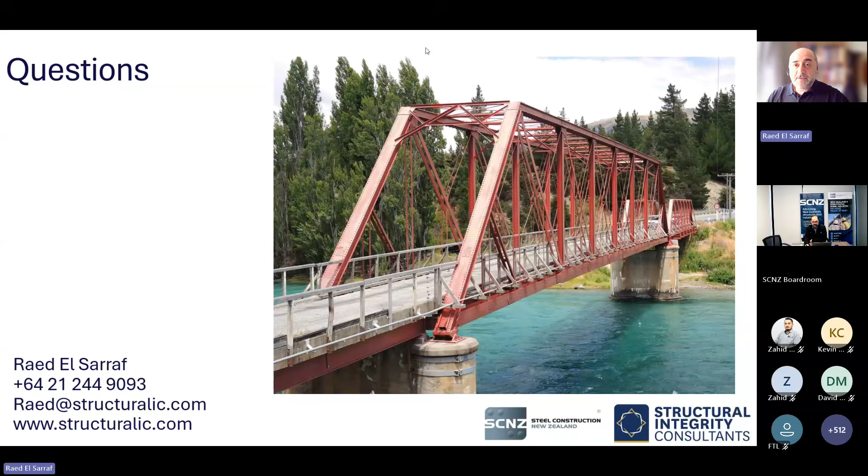So now just going through the questions. I see there's been a number of them. Yeah, I can see them, Kevin, actually. I'll stop sharing just so I can have them in front of me, and I can start from the bottom. A lot of good questions. Okay, hold on. Let's start from the bottom. And we got someone saying, do you know if the inspection testing industry have enough people? And then someone actually answered them as well. There's a whole bunch of commentary going on, people answering each other. That's great.

To my knowledge at the moment, yes, they are there. There's a lot of old NACE 2s, certified coating inspectors, CBIP, and the ACA and galvanized. So yes, they are there. You just need to specify it when you need them for your particular job. From a specification point of view, NZTA S9 is a model specification we have prepared. It's been out since 2020. It gives you an example of a model spec, which also covers all the quality requirements. As a reference, it also has a model inspection and testing plan. So have a look at that.

There's a couple of, okay, let me just... This is: how far inland can prevailing wind extend the distance to be considered C4, C5? The corrosion maps are still there in the country. For the distances, you really need to talk to a metallurgist, and NIWA are great for that. But typically C5, depending on whether West Coast, East Coast, and so forth, is within up to 100 meters to 500 meters, and then it drops to within 1 or 5 kilometers, like we said, maybe getting the numbers wrong now. What we have in Table 2.